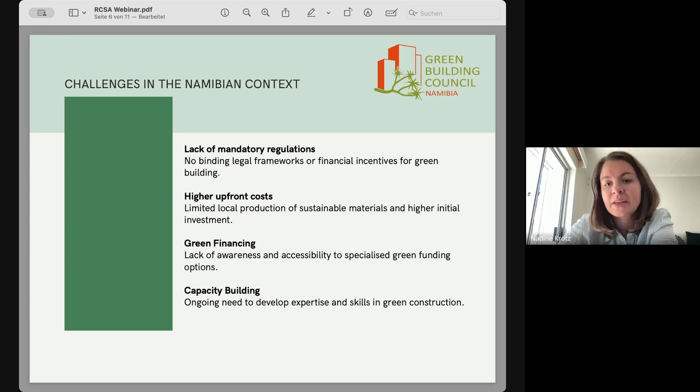We have three different certifications here in Namibia. The two big ones are Green Star and Edge. Green Star is a comprehensive rating system that covers 10 categories.

You can also choose a slightly smaller Green Star option, called Energy and Water Performance, where you just look at the two areas of energy and water. Then we also have Edge.

Edge is a certification system from the IFC that focuses on resource efficiency across energy, water, and materials. The last one is Net Zero, a certification for projects aiming for full neutrality in areas like carbon, water, waste, and ecology.

I also want to highlight another building, the HRDC, the Habitat Research and Development Center, also in Windhoek. It's a great example showing that sustainable building doesn't require formal certification.

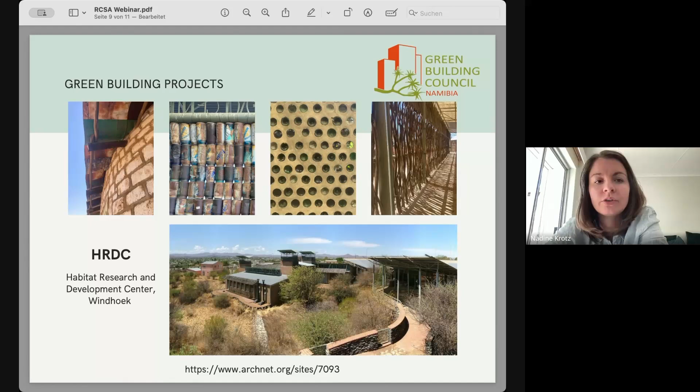For example, here you see different reused materials like bottles, cans, wood, and those aluminium sheets. That project has a high potential for knowledge transfer and affordable, sustainable construction in the Namibian context.

The role and activities of the Green Building Council of Namibia are education by workshop and events, also capacity building, we offer training programs. We work closely together with World Green Building Council and the African Regional Network, which is the network from all African GBCs. We also work together with public and private sector and research institutions.

The future outlook for Namibia is that we hope to have mandatory sustainability standards soon, also ongoing capacity building and a big range of local sustainable materials. Green should not be the exception, but the new standard. It would be great to have sustainability over all sectors, so to have environmental, social, and economic sustainability.

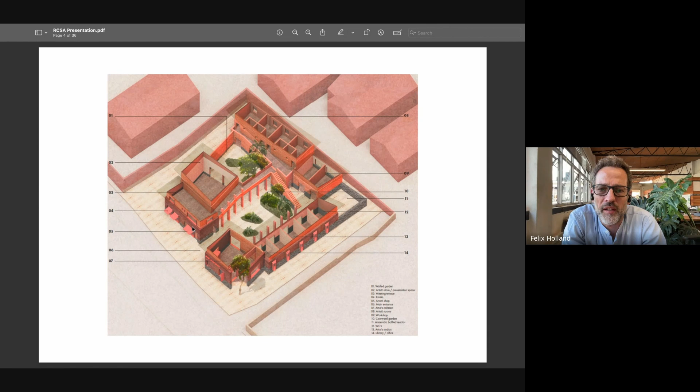We collaborate quite a lot. This is a collaboration with an English architectural practice called New Makers Bureau, who did the conceptual design, and then we took over the technical design development, the engineering, and the construction.

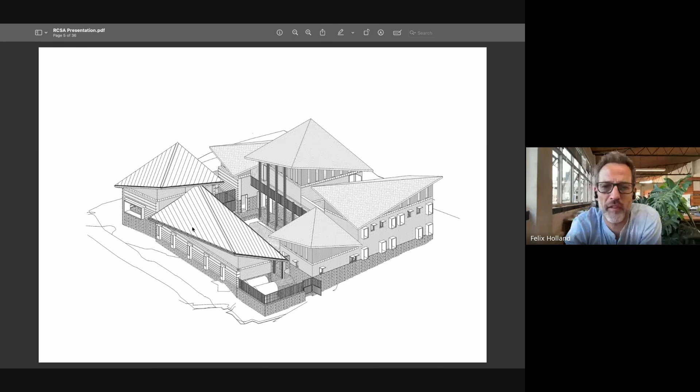This is quite an interesting, complex courtyard development that houses studios and a gallery for artists, an office, a cafe, and it was conceptualized as a hyper-local type of construction with maximum material directly mined on site in the form of earth for the walls.

Obviously, the entire building is passively ventilated. For some of you who live in different parts of Africa, this is possible here in Uganda. We have a very moderate climate, no winter, we're right on the equator, not particularly hot either. So a passive design is perfectly possible for the entire year if you follow certain basic rules.

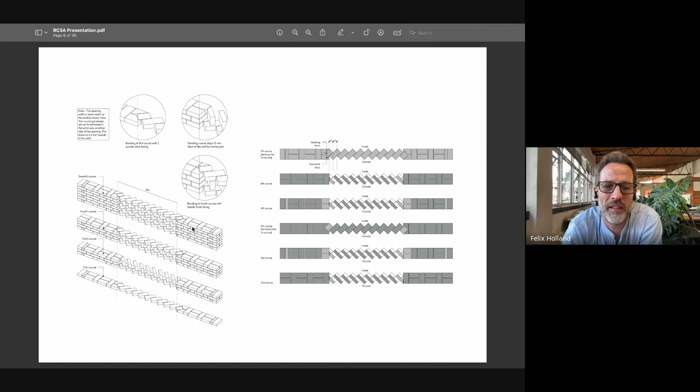Maybe that's one of the reasons why certification, the international certificates, are not really sensible here, because our operational energy is actually extremely low anyway. And most of the energy considerations should actually be going into the embodied energy.

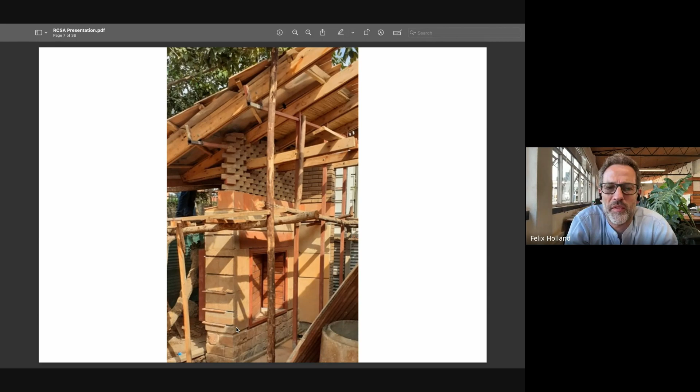One of the beauties of design and build is that we build mock-ups during the design process. This is an example of this particular project that we built towards the end of the design phase. We had a lot of ideas in terms of different textures and materials and how they come together in a very complex roof geometry. So one of the beauties of design and build is that we can do this during the design.

And then, really the whole building is all around texture. As you can see, we are using rammed earth, compressed earth blocks at high level, and local stone in the foundation and in the plinths. And really, the entire project was developed as

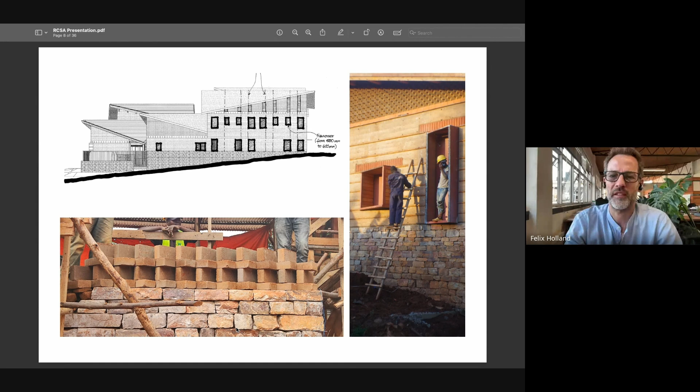a very playful adaptation of different textures. Uganda has a lot of clay, and so there's a rich history of fired clay bricks as well, which you can see on the columns utilizing fired clay tiles, and then the roof is a timber shingle roof made of eucalyptus.

Lots more textures that you can see here. The building is very heavy in its nature. That's partially to do with the rammed earth, but it is also really intentional in the sense that this is a building trying to really create a space in which local artists can thrive, and local artists in Uganda are in a situation where they do need that space and that sort of protection. It's not an easy place to be a free artist.

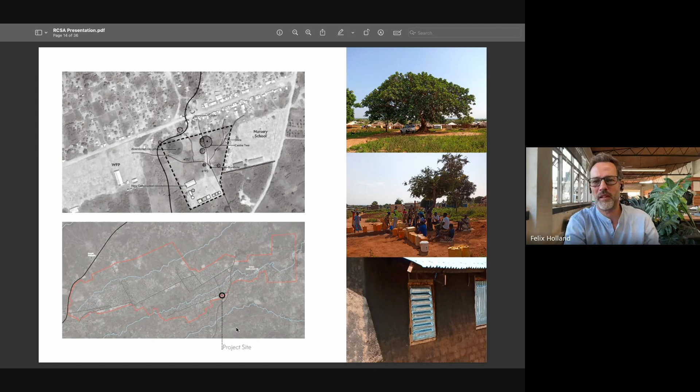The second project that I want to show you takes us to a different corner of Uganda, to Bidi, a refugee camp. This is also a project we did in collaboration, this time with an Australian practice called Hassell. We built this ourselves, right in the middle of a refugee camp called Bidi with 250,000 refugees, mostly from Southern Sudan. And here, everything about this building is around water, because water is the big issue in

Bidi. So you can see in this little perspective that the entire building is actually designed as a funnel, an elliptical shape, and then there's an open amphitheater in the middle.

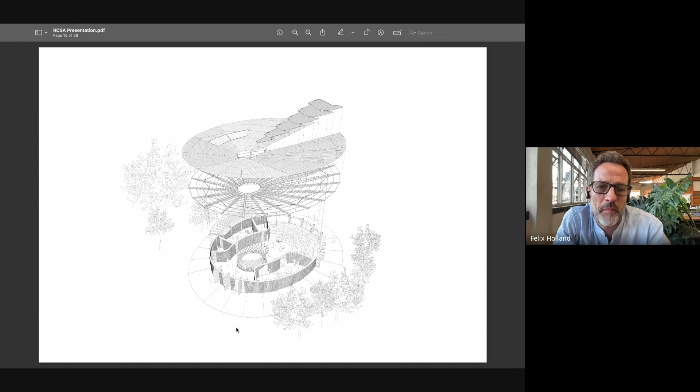This is a music and arts center. 50% of the people in Bidi are below 15. There's a lot of creative talent. So the people developing this project wanted to create this space for creativity and entrepreneurial training. So there's a recording studio built into this building, as well as a teaching space.

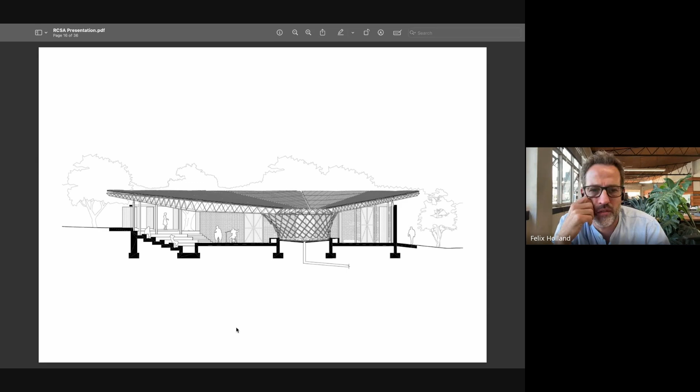You can see in the longitudinal section how the entire building is designed as a water catchment system with a central open oculus through which we collect water, which is then led into a 200,000 liter water tank located outside of the building.

The very complex roof geometry was achieved in a prefabricated steel system, whereas the entire walling around is made out of compressed earth blocks that we hand press on site using the material excavated on site to create the platform for the building. This is a very interesting coming together of prefabrication, planning, high tech, and then low tech local construction.

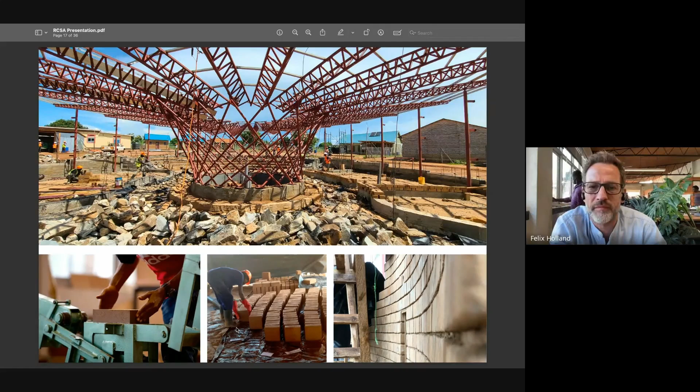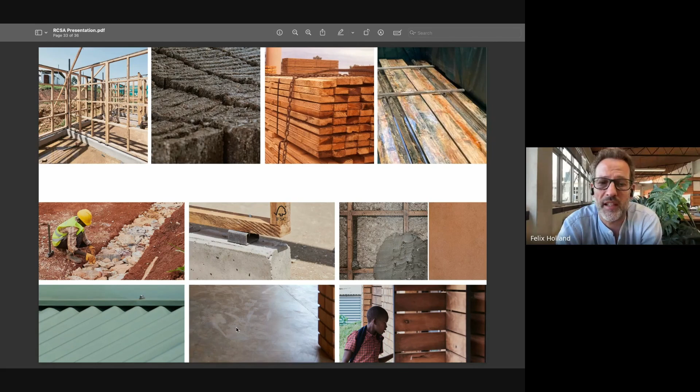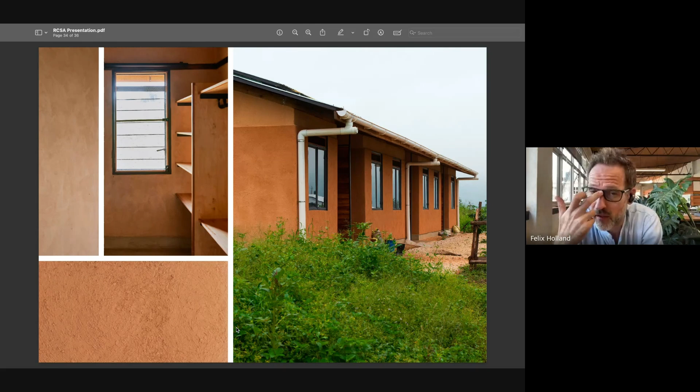These are some buildings that we have finished in this technology. We started with teacher housing, where there's also a very big demand. This image shows the concept of building wooden buildings that actually appear as masonry buildings. This is very important, not only because the plaster helps preserve the treatment and is also very beneficial for fire treatment—it also really helps in a region where timber is not a known or accepted construction material.

The interesting news about this is that these buildings are very carbon efficient, because they are largely based on local regenerative materials. Compared to conventional rural classroom construction, they have a reduced CO2 footprint of 75%.

I'll leave it there. Thank you very much.

Awesome. I don't think you need certifications in your country - these buildings are just beautiful and super sustainable. Yeah, it's sort of a common sense certification, which is actually something we need more of in South Africa, because they've completely lost the common sense when it comes to using local materials and local, just common sense design from a passive point of view.

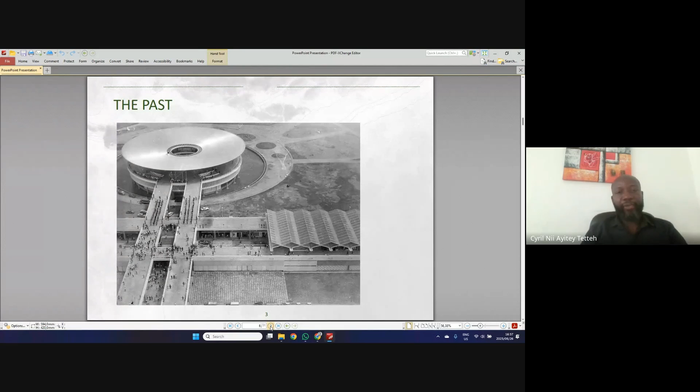This is the International Trade Fair Center. You can see the emphasis on natural lighting and ventilation as well. I'm showing all these pictures just to show that in the different facets of our life, whether live, work, and play, we've always built green, even from the past.

So, yeah, this shows a lot of sun shading devices. This is also from the past, all in a bid to reduce the heat gain. Some of these energy efficiency measures went way back. You can skip to the next.

This is the Kwame Nkrumah University campus, just to also show you and provide a window of what was in the past.

And now I want to bring you to the present. Basically, I'll just highlight what's going on in the general real estate market, and then hone in on the green building market, and show a few of the iconic buildings and some of the rating systems being used here.

I think what pertains here in Ghana is pretty much what pertains globally already. We all know that buildings account for about 40 to 45%, in this particular case 43%, of the total energy used. There are about 1.3 million homes in terms of the housing deficit.

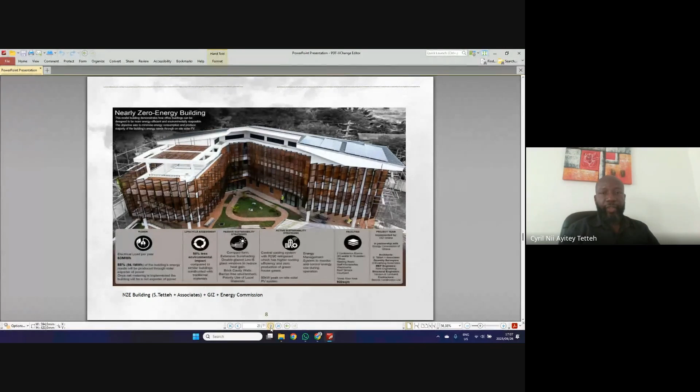This is a nearly zero energy building, also in Accra. It was a project put together by the Energy Commission here in Ghana, in partnership with GIZ and us, and designed by Tetteh and Associates. It's solar powered, as you can clearly see, with a lot of sun shading devices. It's able to support its own energy needs to the extent that it even supplies some to the national grid through net metering. So this is also one of the flagship developments here in Accra.